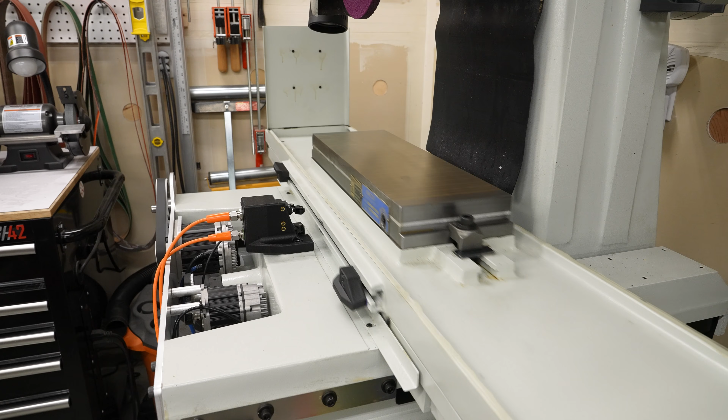I finally have the X-axis of the grinder moving smoothly between the limit switches under software control. It was not a smooth path to get here, but we did get here.

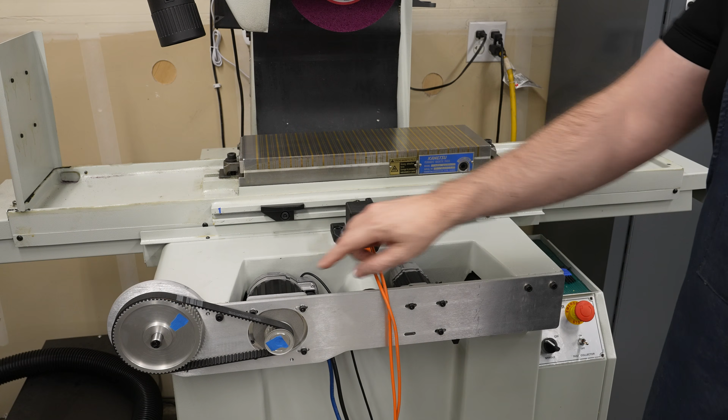I've got the servo motor here connected via a belt drive to the input shaft on the grinder. That shaft drives a spool that then drives the cable wound around it to drive the table back and forth. Everything is running nice and smooth. You can hear the phase converter because I've got the lubricant pump on in the grinder.

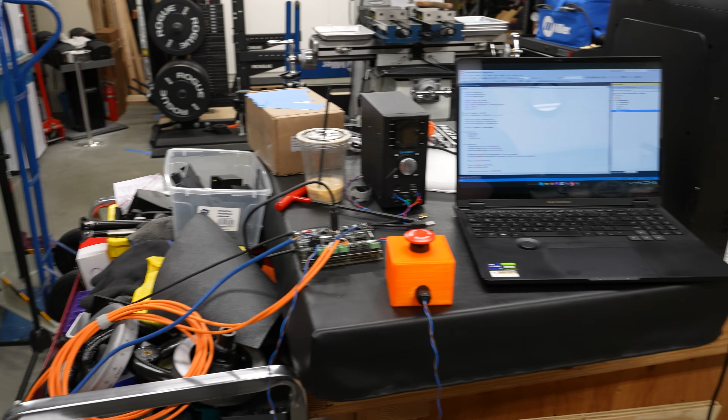We've got our limit switches here that we made in the previous video. And we've got the cam set on the table, not too close to the end so we don't risk crashing it, but far enough that the table should be able to get up to speed. Then those cables come over to the bench here where I've got them connected to the ClearCore controller.

We've got the 2 limit switches left and right hooked up to inputs 2 and 3 and the motor connected to motor 0. And then on input 1, I've also connected an emergency stop switch. For now, I'm just going to use this to turn the motors on, let it run, and hit it to turn it off. Got a bench power supply to provide the 24 volts to run the ClearCore.

And if I power that up, you can see it's got all kinds of nice bright blinky lights. One of the things I really like about this as opposed to an Arduino is it has these lights down on the connectors that show you the status of the inputs. So I'm pressing the limit switches with my right hand and you can see the lights are blinking. That's just great for debugging.

I put together some very simple firmware for the ClearCore just to do some initial testing. You can see here I'm including the ClearCore libraries published by Teknic, and then I've got some definitions up here at the top to do the basic math because the library wants movement in steps, but I really want to think about it in RPM for this case. And it looks like I actually made a mistake here. I've got 1,000 steps per revolution. That's wrong. The motor's set to 800.

And then the rest of this is just about calculating the RPM and whether left and right is positive or negative. To start, I'm going to start very slow with 100 RPM and 1,000 RPM per second acceleration. I think that's going to be safe. And then I've got some definitions here just to put some friendly names on the motor connectors.

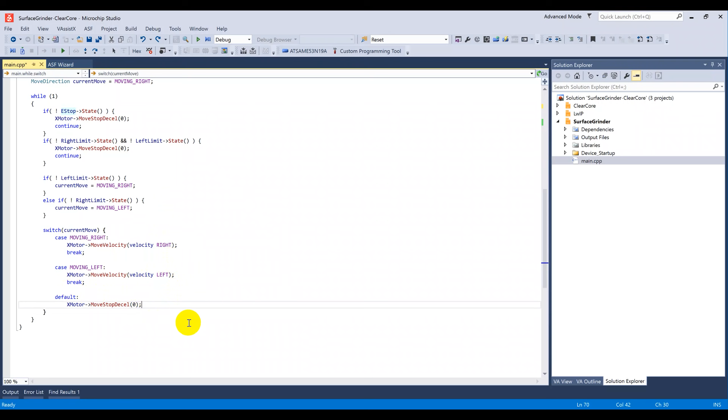Now, I'm going to be calling these over and over and over again, but the underlying library is going to keep track of the fact that I'm commanding it to do the thing it was already doing, and it should just work. And then I've got a default case down here to just stop the motor. There is no other case besides left and right, but just in case I change something in the future and I make a mistake with this, I just want everything to stop.

So consider that paranoia. Then I'll click the button here, it will build and then flash into the controller and we get a nice little light show, which is kind of fun. And that's it. The ClearCore is programmed and we should be ready to give this thing a test run. I'm going to start out nice and slow at 100 RPM and 1000 RPM per second acceleration. We'll just program this into the ClearCore, hit the button and see what happens.

And that is nice and tame. The point of going this slow on the first run is to make sure I have lots of time to hit the e-stop switch if something goes wrong. But this looks pretty good. I did some bench testing, so I was pretty sure it was going to work. Let's go ahead and bump it up to 200 RPM and see what that looks like. Program that into the ClearCore.

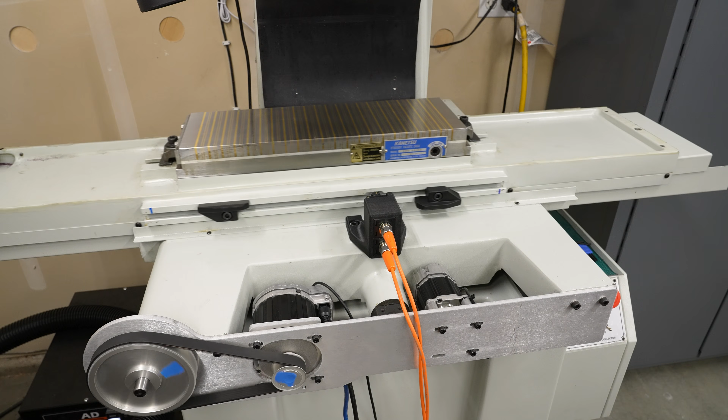And that seems nice and smooth. Now you note that it is overrunning the switches just a little bit further because we haven't increased the acceleration yet. We'll do that in a little bit. But that looks okay. Let's go ahead and bump it up to 300 RPM. I want to take baby steps here because I don't really know when things are going to go wrong, and I would like them to not go wrong badly when they do.

That looks pretty good. We are overrunning the cams just a little bit further. Let's try 400 RPM. That's still nice and smooth because we haven't bumped up the acceleration rate, but you can see it's significantly overrunning those cams. So we're going to need to bump up the acceleration so we can get it stopped and turned around faster. Let's go to 2000 RPM per second and see what that looks like.

That's quicker. It's still pretty smooth. I can live with that. Let's try 3000. That's a little snappier. I like that. I think we're going to need to go further because I'm planning on going to even higher speeds. So let's go ahead and bump this up to 5000 and see what happens.

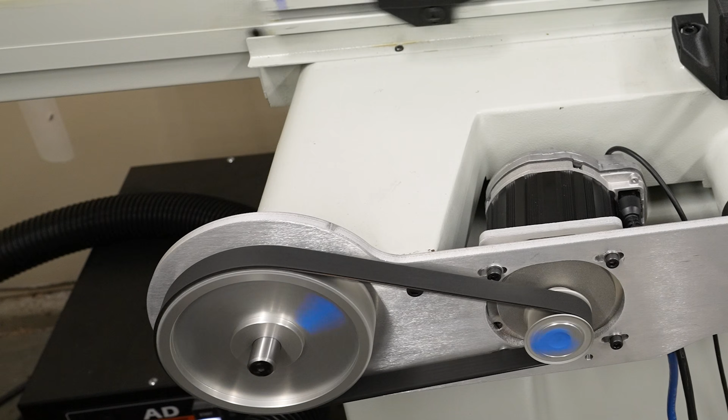That's pretty snappy. We are still overrunning the cams a little bit further than I would like. And you can kind of see the belt reacting a little bit. There's a little bit of jiggle as we go past center rather than it running nice and smooth. So you can just visually see a little bit of the oscillation occurring there. And you can definitely see it when I stop in the middle of the move.

There's more going to the right than there is going to the left. That's because the spool is off center on the cable. There's more cable on one side than the other. But that jiggling motion, that's occurring at the turnaround point, whether you can see it or not. You can just see it better when we stop in the middle. Let's bump it up to 8,000, see if we can make this really evident.

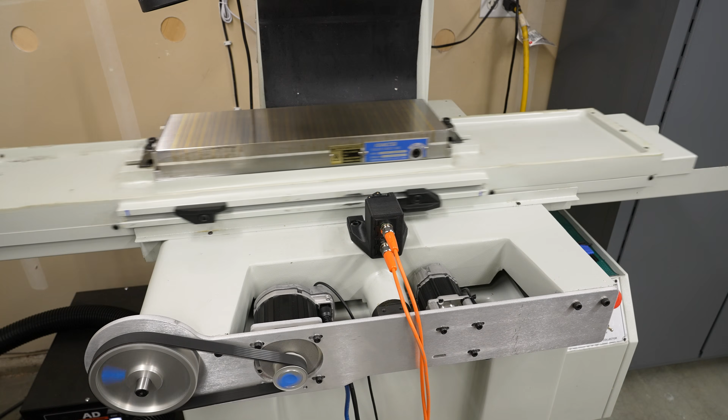So what's going wrong here? The simple answer is that the mechanical system is springy. The table on this grinder is driven by a wire rope wrapped around a drum on the input shaft, and with the mass of the table and the amount of force being applied to move it, that wire rope acts just like a spring. When the servo applies force to move the table in one direction, it stretches, and when the servo applies force in the opposite direction to stop the table and reverse it, that stretch rebounds and the other side of the cable stretches.

Now the servo can't actually see this. It doesn't see the table movement. It can only see the motion of its own shaft. So it can't tell exactly what the table is doing to counter it, but it can see the forces reflected back to it as the inertia of the table acts through that wire rope spring. There's energy sloshing back and forth in the system, and that's the reason why the servo is getting confused and struggling.

I did run the auto-tuning algorithm on the servo so it could learn how the axis behaves and set its control parameters. And while that worked great on the Y and the Z axes, the springiness of the X axis confused it. So I contacted Teknic, and someone from their applications team connected to my computer remotely and manually tuned the motor. That got it working better than the auto tuner, but as you saw, it's still struggling. They suggested that I might want to try the enhanced version of the motor, which has their Regressive Auto Spline smoothing algorithm, and spoiler alert, yeah, it helps a lot.

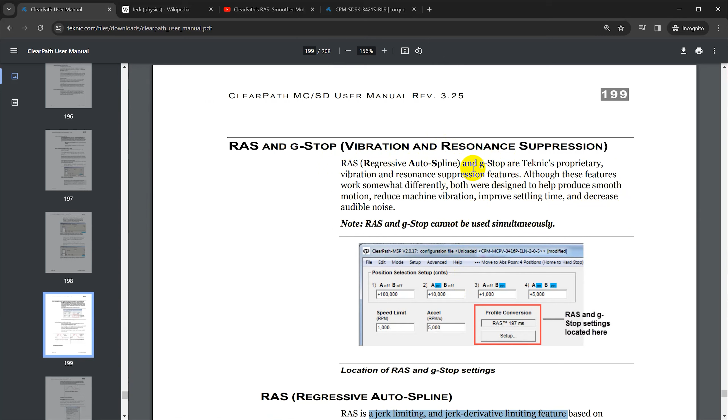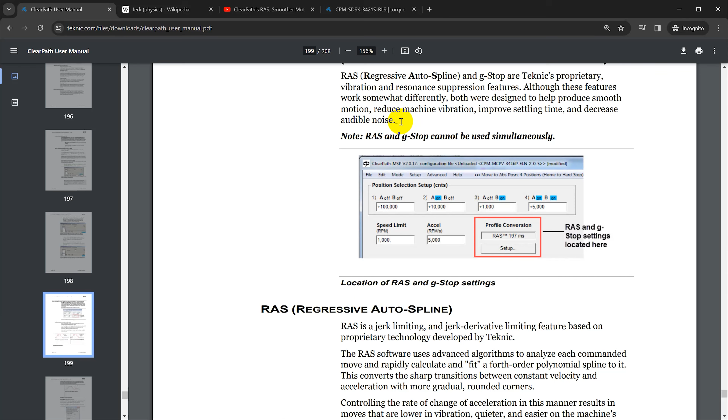So what exactly is this Regressive Auto Spline or RAS thing? Well, if we look at the ClearPath motor user manual and go all the way down to page 199, it discusses a couple of vibration reduction and resonance suppression features. The Regressive Auto Spline, which we're talking about here, and there's another technology called G-Stop that's kind of related but isn't relevant for what we're talking about here. So this is a vibration and resonance suppression feature. The idea is to help produce, they say, smooth motion, reduce machine vibration, improve settling time, and decrease audible noise. That sounds great. That is exactly what I want.

So it says RAS is a jerk limiting and jerk derivative limiting feature. Well, what does that mean? There's a really great article out here on Wikipedia about jerk. Turns out jerk is not just an interpersonal phenomenon, it's also a physics phenomenon. And if you remember your high school physics or high school calculus, you'll know that if you take the function for the position of an object and take the derivative of that, you get a function for the velocity or the speed of the object. If you take the derivative of velocity, you get the acceleration of that object. And that's as far as we generally go with high school physics or any high school math.

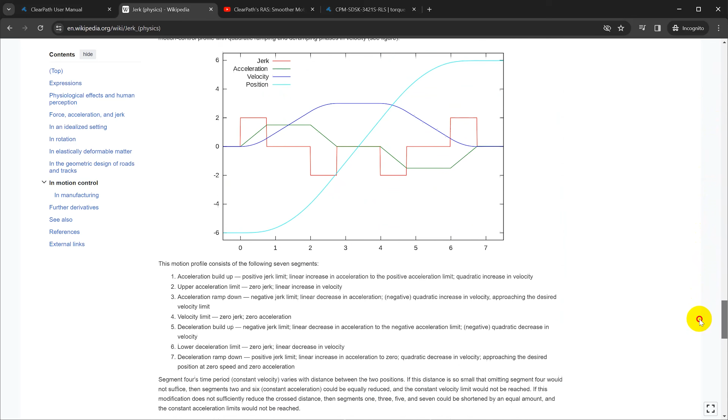But it turns out you can take that further. So velocity is the rate of change of position over time. Acceleration is the rate of change in velocity. Well, jerk is the rate of change in acceleration. And if you take the derivative of jerk, you get the jounce, which is the rate of change of the rate of change of acceleration. Now, why do we care about this? Well, there's a whole bunch of stuff in here and a whole bunch of math, but as a practical matter, what you're trying to do is limit how fast the acceleration comes on and goes away.

So if you think about driving in your car, when you press the accelerator down, you are adding power and creating a force that leads to an acceleration of your vehicle. You don't want to do that suddenly. You don't want to slam the pedal to the floor, and when you get to the speed limit, you don't want to lift suddenly and throw your passengers forward. You want to ease into the acceleration and ease out when you reach your desired velocity.

The same thing, by the way, occurs in track or road design, where you're coming in a straight line and you need to enter a round curve. You don't want that line to come tangent to the curve because you would suddenly have to snap the wheel to the side and it would throw your passengers around. Instead, you have a gradual transition. And what this is doing is limiting the jerk of that horizontal acceleration.

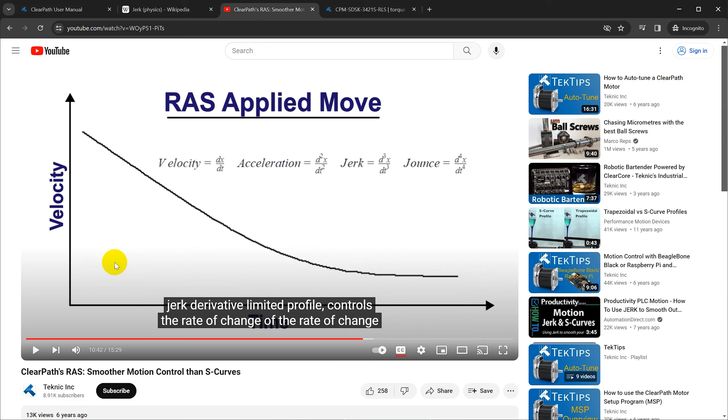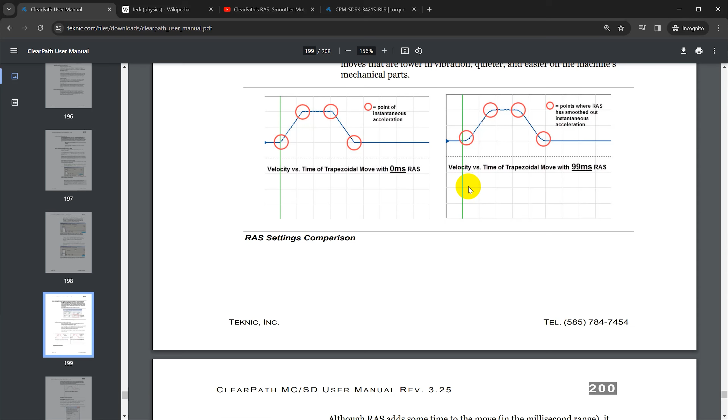Now, the one thing that you do have to be aware of, though, is that because the motor is the last technical item in the chain, it's the last thing to know about what you want to do. It doesn't know that you're going to accelerate. It doesn't know that you're going to stop acceleration until it actually receives those commands. So if it's going to smooth out these curves, it's going to introduce a delay. So if you're sending commands to make a trapezoidal move, it can't move suddenly and follow that path. It has to lag behind it a little bit, because if it's going to smooth out that curve, it has to have time to accelerate. So it's necessarily going to fall slightly behind.

And how far it falls behind depends on the setting. If you have it set to 0 milliseconds, it's going to follow the trap curve. If you have it set to 99 milliseconds, it's going to fall a little bit behind. If you have it set to 197, it's going to fall even further behind. And you could, in theory, with a motion controller that implements this, start early so you stay closer to this curve, but you can't do that in the motor because the motor doesn't know in advance that you're going to make the move.

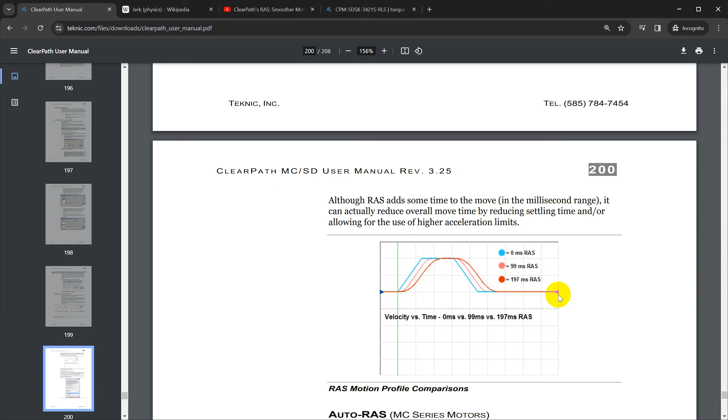So this is the main trade-off: as you turn this value up, you get smoother motion, but at the same time, you introduce a little bit of a delay. Though technically, because there is less vibration, the settling time might be faster, so when you're designing your machine, you might actually be able to move on to the next move sooner. Now, as a practical matter, we do need to get a different motor to enable this.

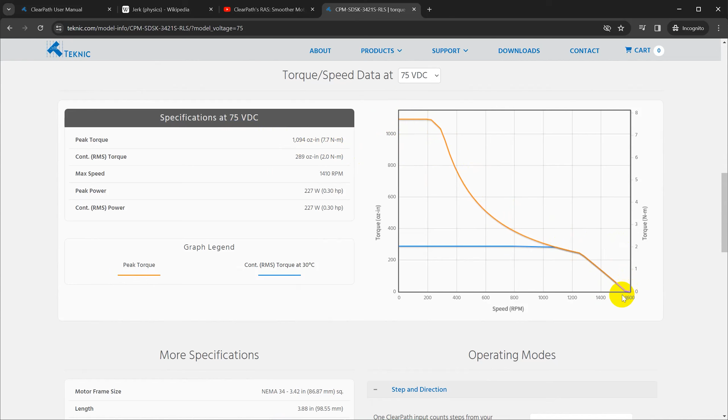This is the motor that I bought originally. This is the regular version of the NEMA 34 Clearpath. And I chose this particular model of motor based on the peak and continuous torque and the torque to speed curves. I still think this is about the right motor for this application, but there are two versions available. There's an enhanced version and a regular version. I got the regular version.

The main difference is the regular version has a maximum resolution of 800 steps per revolution. If you need more than that, the enhanced will go up to 6,400 steps per revolution. And the other is the RAS or jerk limiting settings that are available. There's a little bit of RAS available on the regular motor, but if you want to get up into the range that we're going to need, you have to buy the enhanced version.

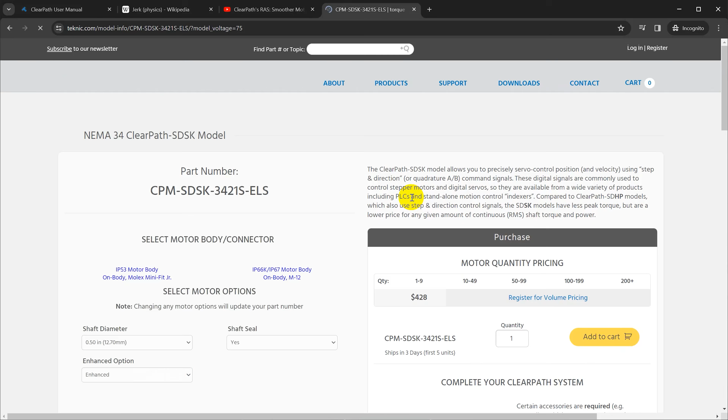So for this particular motor in the US right now, it's $371 for the regular version, and if we select the enhanced version, it's $428. So you are paying a premium for those features for essentially the same basic motor, but with the additional resolution and the additional RAS settings.

Before we turn up the RAS value, let's run this again with the settings that we had before. That's 600 RPM and 6,000 RPM per second acceleration, and take a look at the scopes. Now the blue trace here on the scope is the velocity. You can see it's close to a trapezoidal motion curve, and the red trace is the position error.

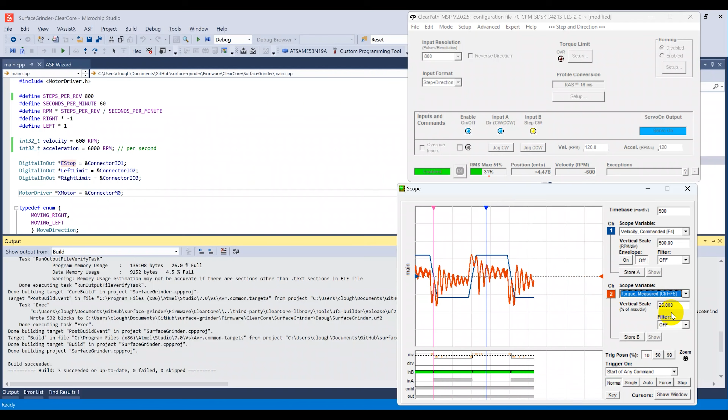If I switch that over now, so the red trace is showing the torque, you can see the motor oscillating in its torque output, trying to fight that vibration that it's seeing feeding back through the springy cable from the table. And you can really see it fighting to try to bring it to a stop.

Now the RAS value is currently set to 16 milliseconds. That's the maximum you can set the non-enhanced motor to, but we can set it higher on the enhanced version of the motor. We're going to dial it up here to 197 milliseconds, which is kind of what I've determined is about optimal for this setup. And you can see two things immediately. First, the corners of that trapezoid are rounded over. And second, the torque oscillation is gone.

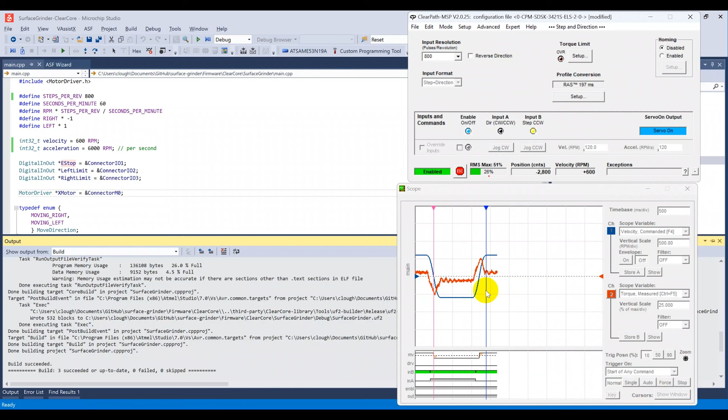We just see a spike in the torque when the table actually changes direction, and then the continuous torque while the table is moving is much lower, and you don't see those big oscillations. Overall, the motion is much, much smoother. And if you look at the belt, you don't see the belt flapping around because those torque oscillations are not there.

And switching back to the position error on the graph, you can see the position error is much smaller and it reaches steady state much more quickly. And we don't see any of the oscillation or bouncing on the stop either. That is a huge improvement.

Now that we've tamed the system down, we should be able to turn the acceleration up higher. So this is 6,000 RPM. Let's go ahead and bump it up to 10,000 RPM per second acceleration and see what that looks like. It's a little quicker on the turnaround, but it seems to be just as smooth. And we're still not seeing any bouncing on the stop.

Let's bump it up to 25,000 RPM per second acceleration. That's even quicker. It's traveling not as deep into the stop as it was. Because of the delay from the RAS, it was traveling a little deeper into the stops than what we were seeing before, but turning up the acceleration will help to counter that.

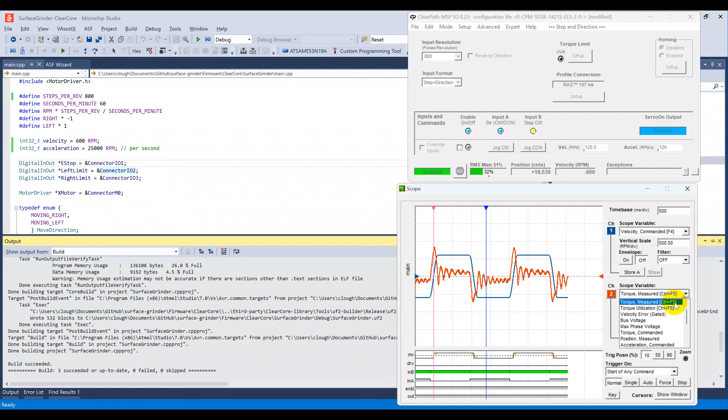We are starting to see a little bit more oscillation in the torque curve there. And you can see the rounded corner on the trapezoid is a little bit sharper. It's still rounded, but it's sharper because the acceleration is so much higher. But the position error still looks pretty good. I think this is probably about as far as I want to push it. I think that's a quick enough turnaround. That looks to be working okay to me.

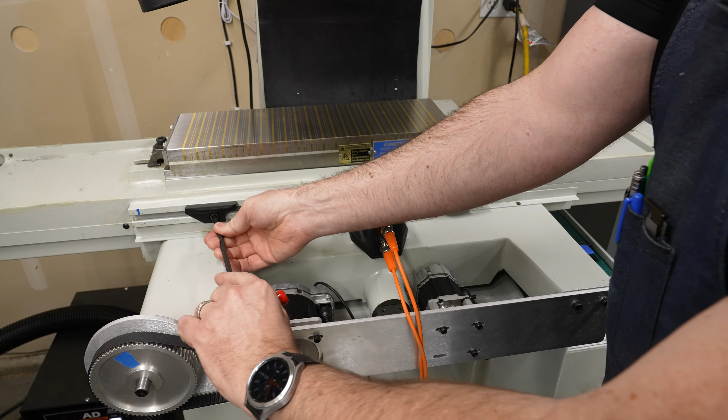Let's go ahead and adjust those cams and see if we can get this to travel all the way out to the ends of the chuck so that we could actually dress the entire 18 inches of the chuck with the about 19.5 inches of travel of the machine. Now, I've been running this before with some different settings, and I've got some little marks there for the maximum position I could put those cams out to without crashing into the end of travel.

But I'm going to sneak up on this slowly. I'm kind of looking at the end of the guards there and trying to understand where I am. That's running nice and smooth. I think we can go all the way out to those marks. When I was testing before, I had the steps per revolution on the motor set to 1,000 instead of the correct 800, so I just want to be careful here and make sure I don't hit the end.

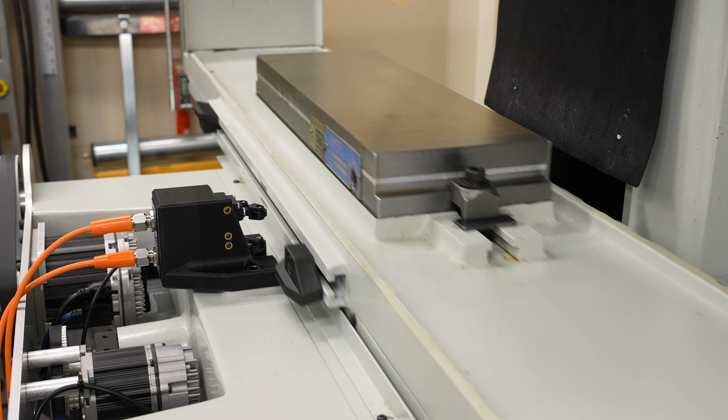So I believe that is the full travel. We're traveling more than the 18 inches of the chuck. We're getting within a millimeter or 2 of the end of travel of the table. And that looks great. I think that's probably faster than I would have been able to crank this by hand. That looks good. I think I'm going to stop tuning here. I think these settings will work just fine for what I want to do.

Now, there is one thing that I would like to try. Let's go ahead and lower the RAS value now that we have the acceleration turned up and just see what happens. I'm just going to lower it to 130 milliseconds. I'm not going to turn it completely off, but just lowering it, let's see how the machine responds. Yeah, that's not good. Oh, look at the position error. Yeah, that's just all over the place.

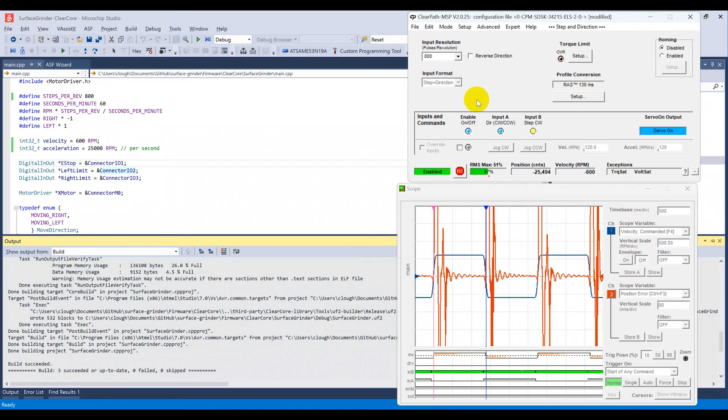And that little beep and flash you saw there was the motor torque saturating. So it reached the maximum torque output and had to reduce power. So yeah, that's not going to work. It would not be able to run at these accelerations without that high RAS value. So we'll set it back to 197 and we'll leave it there for now.

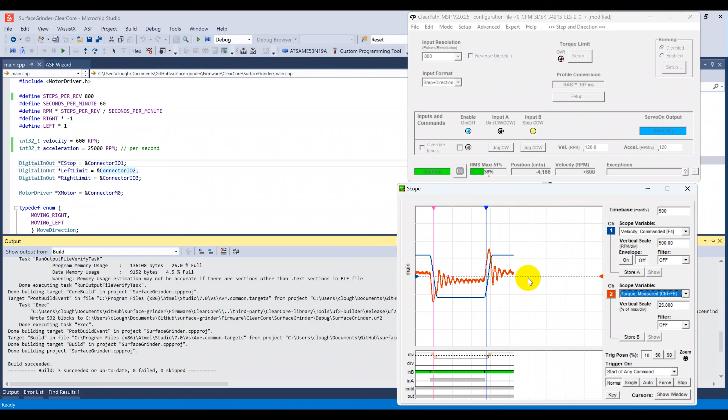Yeah, looking at that position error, I am really happy with that. It's so much better than what I was seeing before. I think this is going to be totally usable for actual grinding. And I don't think that that measured torque oscillation is going to be too big of a problem. We'll see if it shows up in the grinding finish, but I think this is probably going to be just fine. And it looks like the absolute maximum peak on the torque there is still well under 50%, maybe 35, 40%. So I think we've got plenty of margin left on the motor.

Now that's more like what I had in mind when I started this project. There are always little twists and turns with large development projects like this. I was pretty discouraged when I saw how the table was moving initially, but I stayed with the problem and eventually found a solution. And as usual, I learned a few things along the way. There's still a long way to go on this project, but it feels good to finally have something, anything, actually running end to end.